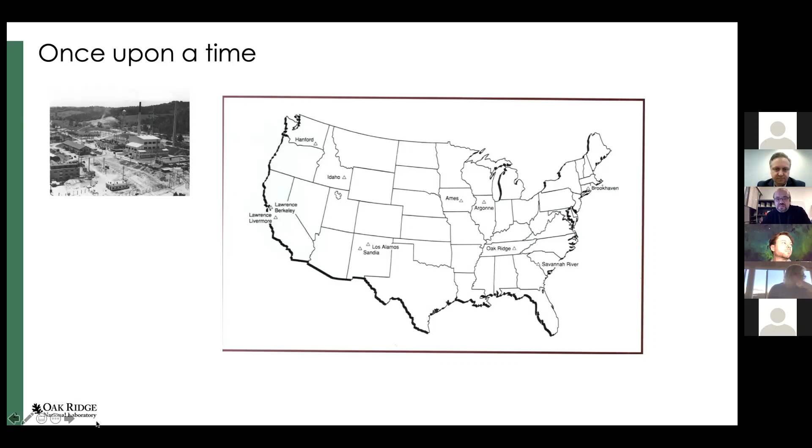And once upon a time, to be exact, back in 1943, as a part of the Manhattan Project, they bought a piece of land here, which is quite remote from everything else, to start the X10 facility, which is the graphite reactor shown here for the Manhattan Project. So it's a part of the other national labs. It's the largest one of them, I believe. And right now, this is what it looks like.

It has two main campuses. One is the campus in Oak Ridge itself, that's where I am, and another is the NTRC campus, which is in West Knoxville. It's about a 15-minute drive from Oak Ridge. And this is where we have the battery manufacturing facility and additive manufacturing facility.

We actually house a full industrial battery manufacturing line here, which can produce, I believe, up to 5 amp hour capacity pouch cells. So there is a pouch forming machine, an electrode punching machine, an electrolyte filling machine, and all that. And we can pull the vacuum on those pouch cells and weld the tabs and test them there. I believe the total workforce is about 6,000 people. 2,000 of those are R&D scientists.

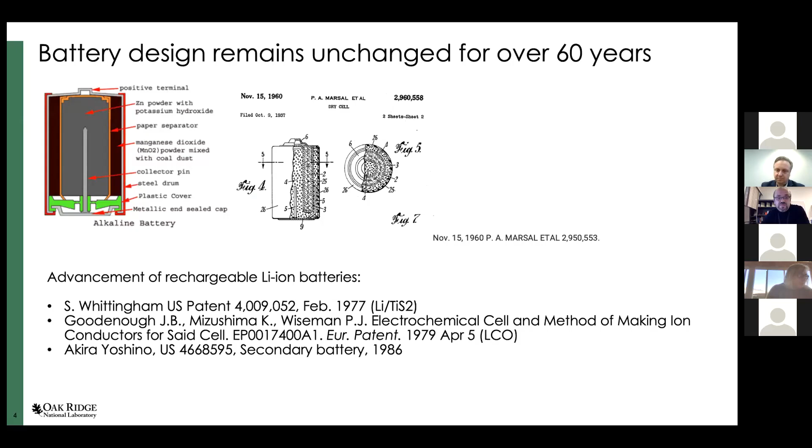So why are we thinking of changing something in terms of batteries and solid state? If you think about it, the design of batteries hasn't changed over many years, 60 years or even more. These are the pictures from the alkaline battery patent filed by Marsal et al. in 1960. And this cylindrical battery form with the positive and negative electrodes separated by a porous separator remained the same over many years.

There are obviously advances in rechargeable batteries, lithium-ion batteries, starting with Stan Whittingham and John Goodenough introducing lithium cobalt oxide into the system. So there's been a lot of research on increasing the capacity of the cathode material, coming up with different ways to manufacture the separator, but the overall principle remains the same.

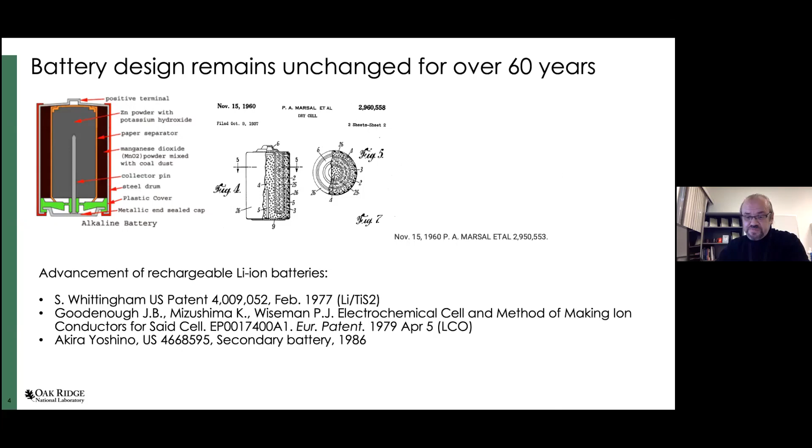But like I said, the basic operating unit of the battery remains the same over many years. You have positive and negative electrodes flooded with the liquid electrolyte, which has flammable solvents. It has a salt dissolved in the organic solvents, which are quite flammable. And the only thing that separates electrodes of opposite polarity is the separator, which is a porous polymer membrane. This is a highly anisotropic system. You have particles that behave ceramics-like mixed with rubber-like binder materials and coated on top of the metallic current collectors.

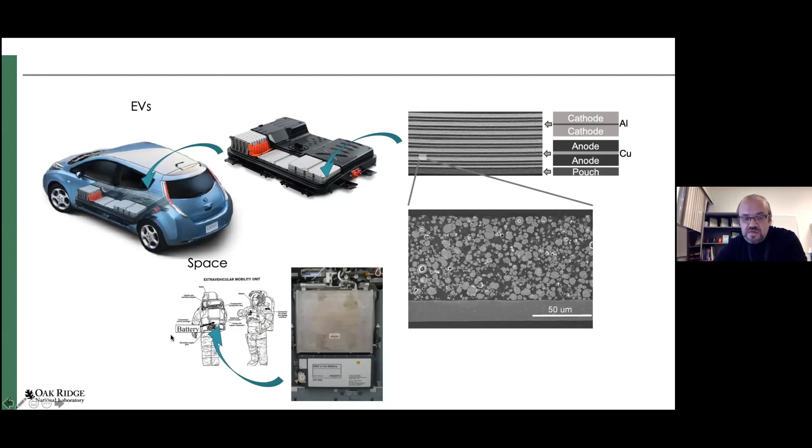And the safety of this whole system relies pretty much entirely on the integrity of the separator, which is a critical component here. Once it fails, you have contact between the electrodes, positive and negative, which releases a lot of energy. And since you have flammable liquids in the system, this can lead to consequences. Now, the thing is, there are not so many requirements on the mechanical integrity of the separator. If you look into the standards and literature, the biggest standard you can find is that it should withstand the tensile force of the winding machine when you're making a battery, and that's not much of a force, to be honest with you.

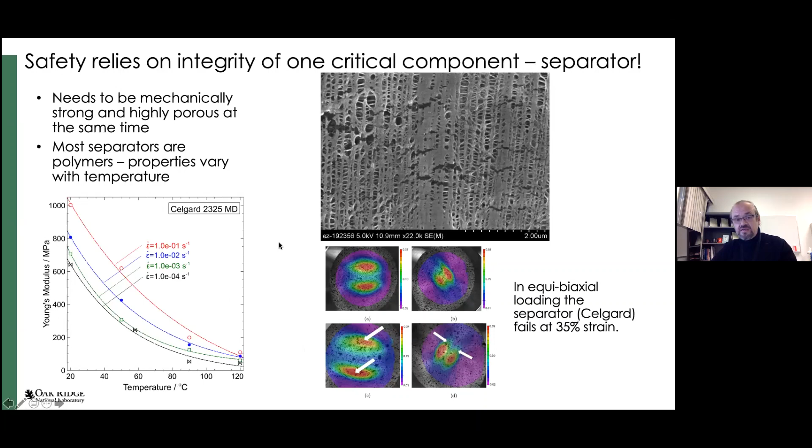So, fun fact: it being polymer, its strength and its properties obviously greatly depend on temperature. And if you look at this graph, at the operating temperature of batteries, just increasing it a little bit will decrease the Young's modulus by a factor of 2, depending on the applied strain rate. This is in tension for the Celgard separator. And another fun fact, it takes only 35% of biaxial strain to break it. This was part of the Department of Transportation project to find out how the pouch batteries fail due to the penetration of the trailer hitch through the battery pack. So it's only 35% strain. And then you have a failure, and then bad things happen, something like this.

These are all very familiar pictures that everyone has probably seen online, except maybe, let me see if I can get the pointer going, except maybe this beautiful firework. And believe it or not, this is actually the battery from that EMU unit that the astronauts carry on themselves. So this is what happens when you get the short circuit and thermal runaway in that system.

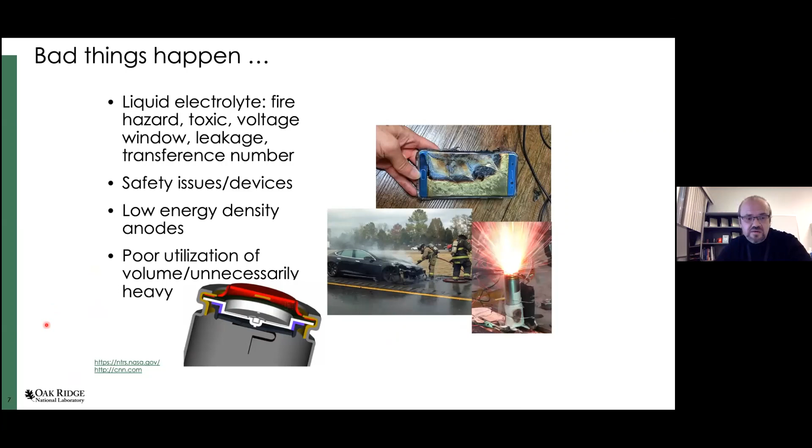So it's only natural that instead of dissolving salts and having electrolytes with limited transport number and highly flammable properties, it would be nice to switch to something else, more safe, with the transport number as close to unity as possible, and having transport over the crystallographic lattice rather than by dissolving the salt in the liquids. And so these are the advantages of solid-state batteries, some of which are quite obvious. As I mentioned, there is no electrolyte to burn, there is no gassing, there is no need for sophisticated fire protection systems as a result of that.

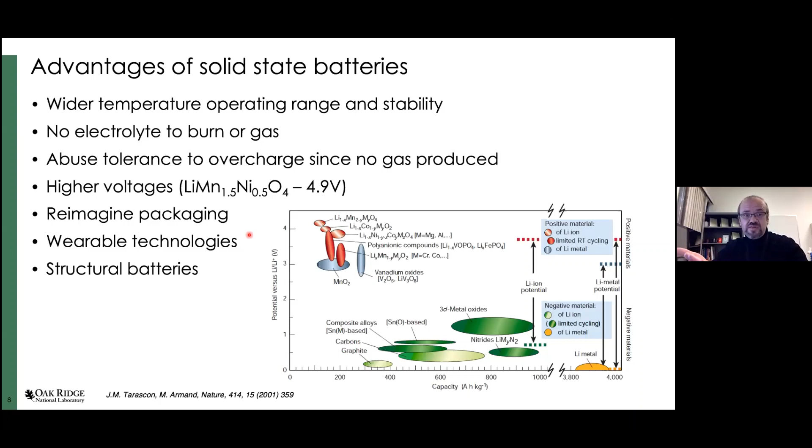You can get to higher voltages, especially if you use metallic lithium as your anode, which creates the highest possible potential window. And the last three are very interesting to me, because since these are solid state, you can reimagine how they're packaged, you can reimagine how they're made. In the extreme visionary cases, you can even imagine them being 3D printed into different shapes because they're so flexible in shape and form factor. You can introduce them as wearable technologies. And finally, because solid electrolytes, if they're designed properly, are quite stiff, you can potentially integrate them into structural components. So these are all advantages. Looks good on paper. It's a great idea, but we are still kind of far from realizing it.

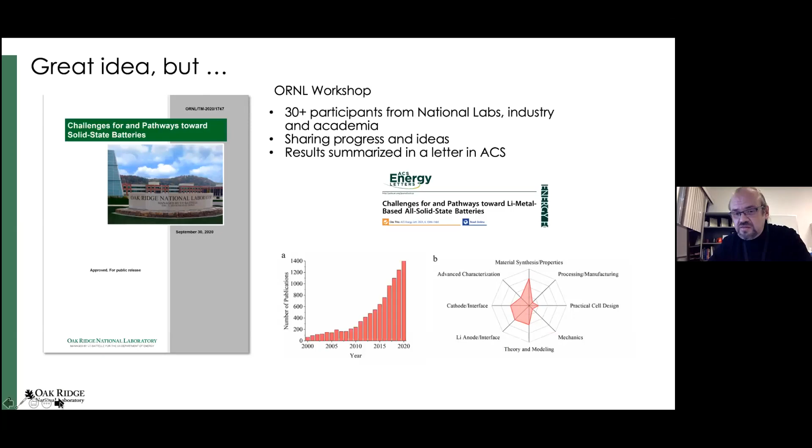working. And there is not much knowledge on the mechanics, whether it's important or not, mechanical properties of the components, and how to make all those battery components play nice with each other and create robust interfaces. So this mechanics part is probably what I will be focusing on mostly in this presentation.

Now, the key for the whole solid-state battery deal is the electrolyte, because it should work with the lithium anode. And throughout the talk, the anode here is metallic lithium, because it only makes sense to move to solid state if you have metallic lithium, because that's when you push your energy density to the maximum. So it should interface lithium anode, it should interface cathode particles, presumably the same cathode particles that we know are working now in the conventional batteries.

And at both interfaces, there is a chance for fracture. There are mechanisms for stress relaxation, about which I will talk. There is obviously, since we're talking about lithium, which is a highly ductile material, influence of plasticity and creep, but it doesn't always operate. Again, I will talk about it in a few slides.

And when it comes to the interface with the cathode, simply because repeated insertion and removal of lithium-ion creates strains, we're well aware of that, especially in the layered transition metal oxide materials. You have strains along the c-axis, so your electrolyte should maintain contact with those particles throughout the cycle. That's the idea.

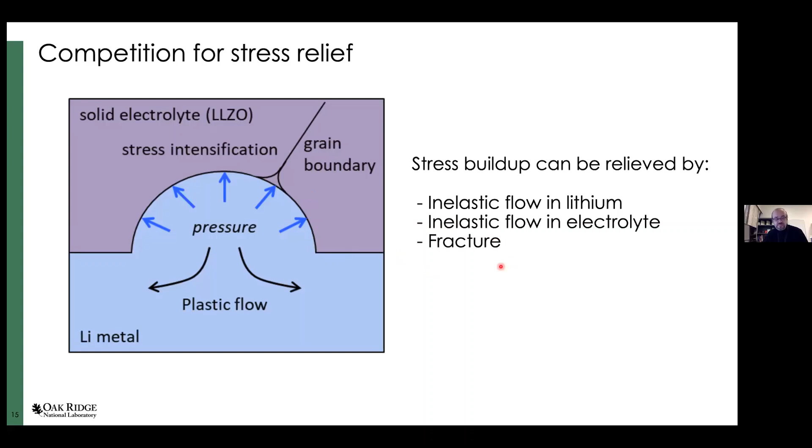And the third mechanism, which unfortunately we encounter in the majority of cases, is fracture that will reduce the stress buildup. So our goal here is to somehow trigger these two mechanisms in either lithium or electrolyte to avoid the third way to reduce the stress. So let's start with what happens in metallic lithium at the appropriate length and time scales.

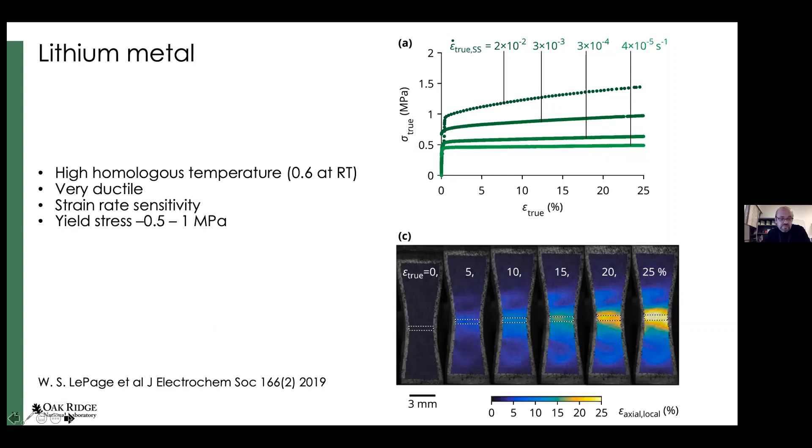So this is a very interesting mechanism, because if your defect is very, very small, lithium can relieve stress by diffusion. Since the distances are very small, it has just enough space to reduce the stress buildup simply by diffusion. If your length scale is large enough, it can start relieving the stress by dislocation motion. But if there is a defect of just the right size in between those regimes, it will build up stress to very high levels. So this is what can be called a danger zone. This is quite a peculiar behavior of lithium.

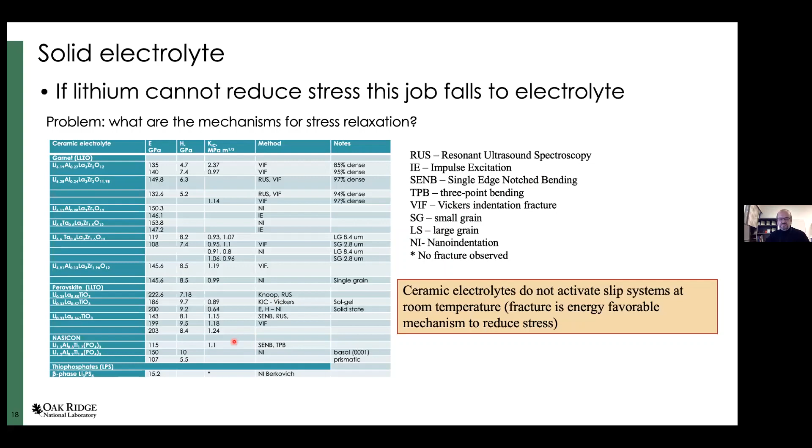This table compiles values of fracture toughness obtained by different methods, and we need to be really, really careful how we compare them, because fracture toughness obtained from single edge notch bending represents the strength of many grains. It's really a bulk measure, and fracture toughness obtained from nanoindentation is a totally different measure.

And Dr. Kalnaus, we have a question, if we can, because it's related. We have 2 questions. Yeah, sure. Sorry, because it's related to slide 17, I think. There's a question from Matt Petraquila. Is the length scale versus strain rate of interest primarily in electrode thickness, or would this be considered a potential limitation of pouch cell form factor size in the length times width dimension for material creep?

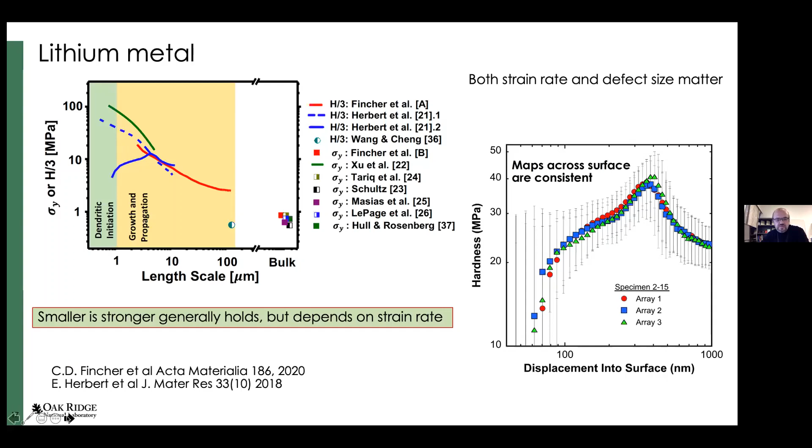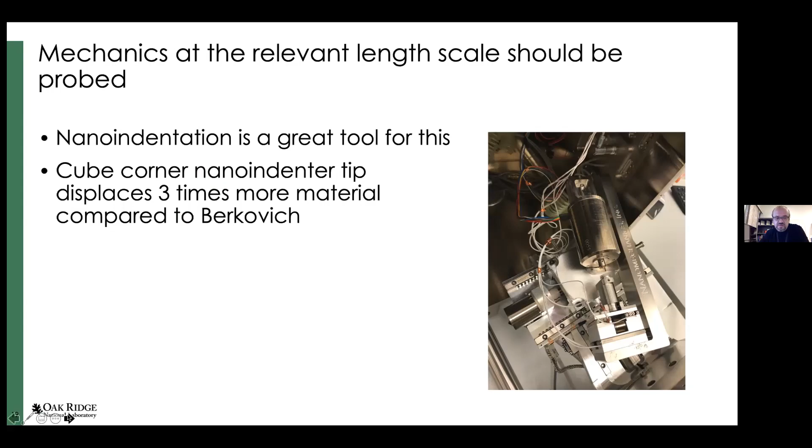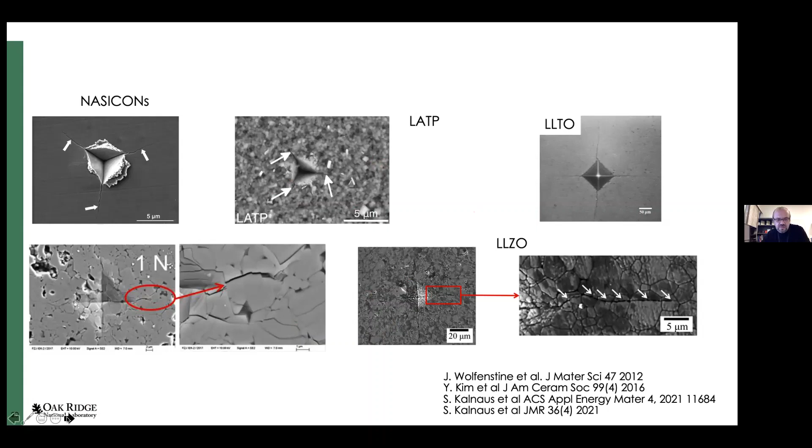And if you do these tedious, almost sadistic experiments of doing this many times and measuring the crack lengths, you can numerically calculate the fracture toughness and get exactly those values that are shown in the table. Most of them are 1 megapascal square root meter or less. So this sounds like we're almost doomed, because all of the materials fracture, all of them will let lithium dendrites go through and deposit into those fracture surfaces. But there is actually a glimpse of hope. There are some ways to impart some ductility into ceramics.

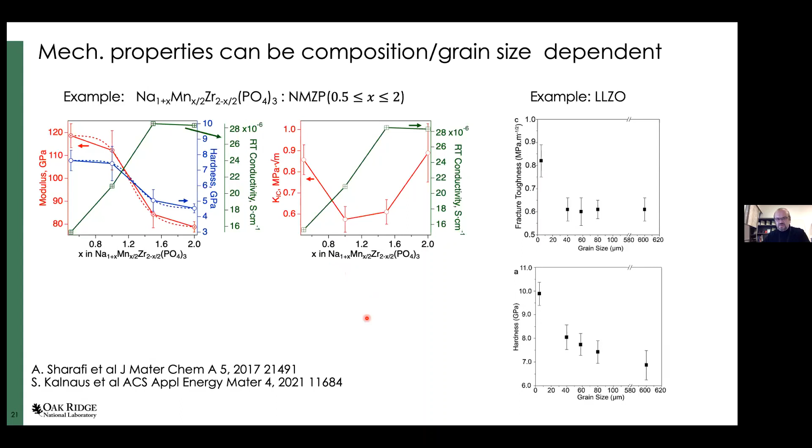Oh yeah, I need to mention that these properties, fracture toughness and elastic properties, very often depend on the composition and are connected with the ionic conductivity of the materials, as shown in these 2 examples, one for the LLZO garnet and one for the NASICON electrolyte. The nature of this dependence is still unknown, but it can fluctuate quite a bit depending on the composition of the material. So are things really that bad, and what can we do to make it a little bit more robust?

So one scenario that is picking up attention in literature, and I think in many cases it's the way to go, is to introduce dislocations into ceramics during the manufacturing. Generating dislocations in ceramics is hard. It's very hard. That's why they fracture so easily. But moving the existing dislocations is much easier. So the question is, why not implant the dislocations? And this procedure is known as dislocation toughening. You can implant dislocations into ceramics just by using different processing methods.

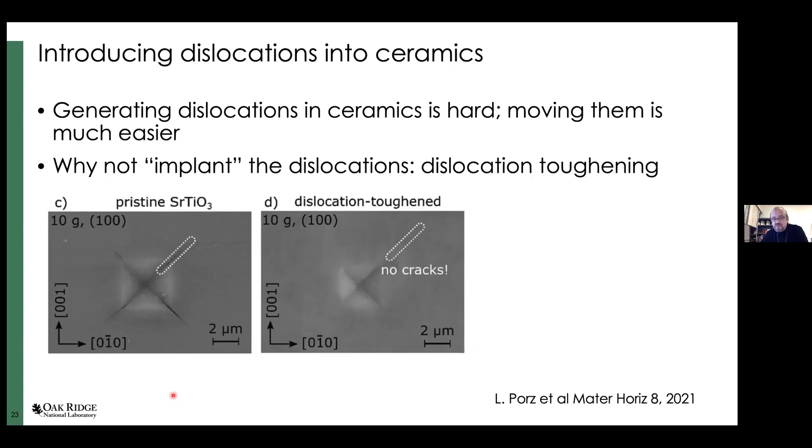But the results are quite clear. You can see the cracking here, and after dislocation toughening, the same Vickers indentation produces no cracks. So that could be one of the potential routes to battle that brittleness in crystalline ionic conductors. And another way is to use ductile electrolytes and step away from the ionic crystals and look into the glassy electrolytes.

So amorphous or glassy materials are very weird because in addition to just fracturing, they deform without conserving the volume. They can densify. They have just enough free volume to absorb plastic deformation by densification. So they have three mechanisms to reduce stress. Ceramics pretty much have only one, fracture. In case of glasses, you have three ways to reduce the stress buildup. One is the material can densify.

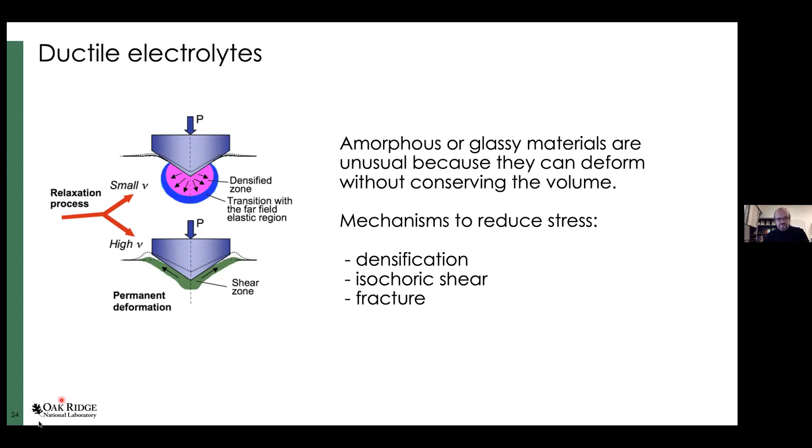It can flow in shear, very surprisingly. Actually, glasses can flow, can produce somewhat plastic deformations similar to metals. And obviously, the third mechanism is fracture. And again, our goal is to find the material that can densify or flow in shear, but should not fracture. And it seems that LiPON, I have to be patriotic about LiPON since I'm from Oak Ridge, LiPON is one of those materials.

So this is a simple comparison of a commercial borosilicate glass, which has glass formers inside, so it has a pretty rigid structure, and LiPON indented by the cube corner. This was indented to 50 millinewtons, and this is to twice the load. And you can see that LiPON deforms, shows very substantial pileups. It deforms in shear without any evidence of cracking. So this is very high load indentation. The nanoindenter went more than 2 micrometers down into the material without producing any cracks.

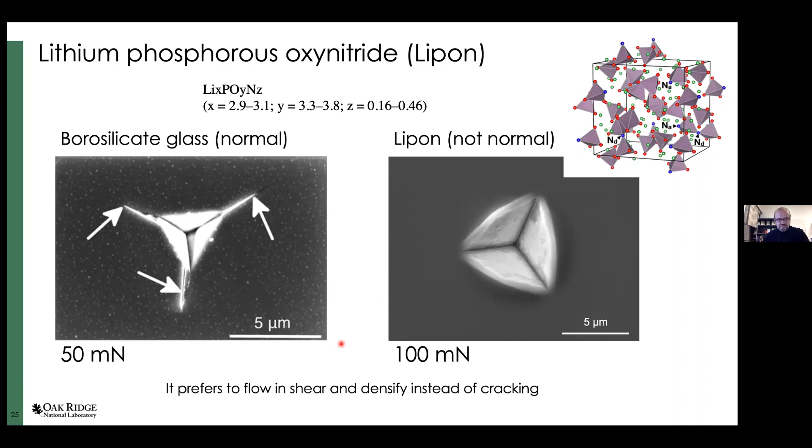So this unusual behavior has something to do with the structure of LiPON. That's why it behaves so abnormally. It doesn't have a rigid structure. The phosphate tetrahedra are relatively free to move around in this almost a soup of alkali ions, of lithium ions. And they're relatively free to slide with respect to each other and deform bond angles. And the amount of nitrogen that connects those tetrahedra is relatively small. So it allows it to deform without producing any cracks.

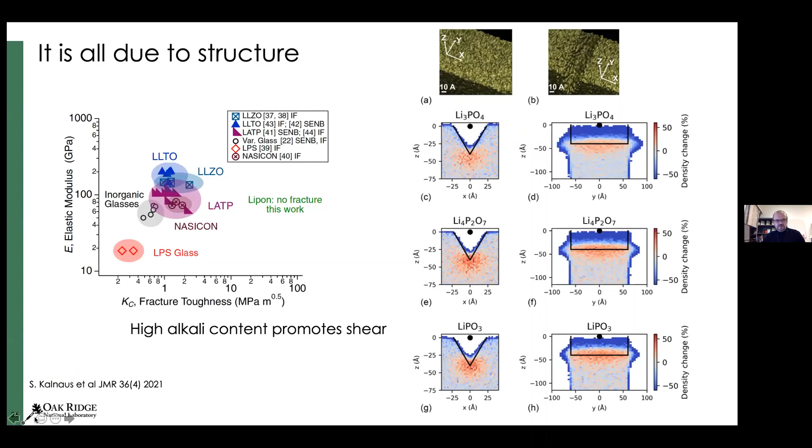And all the simulations are unfortunately done without nitrogen, simply because the force field for compositions with nitrogen is not known. But we don't believe nitrogen would change this behavior too much. What is clear here is that the material with the highest concentration of lithium or alkali ions in the system exhibits most of the shear deformation. So we have 3 lithiums per 1 phosphorus. This is exactly what we have in LiPON. The take-home message is that high alkali content promotes shear in this material. And again, no fracture has been observed, at least under these loads and these strain rates.

So it can densify and then restore that free volume a little bit. Now, this is not new for many glasses. Many glasses can do that, but you will need to input some thermal energy into the material to allow it to restore this deformation. And in LIPON, this happens at room temperature, which is absolutely bizarre, and which inspired us to do this weird test where you apply the sawtooth signal to the nano-indenter.

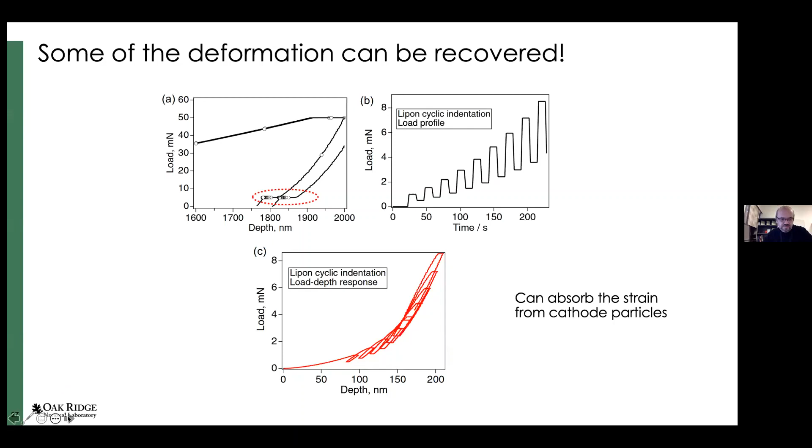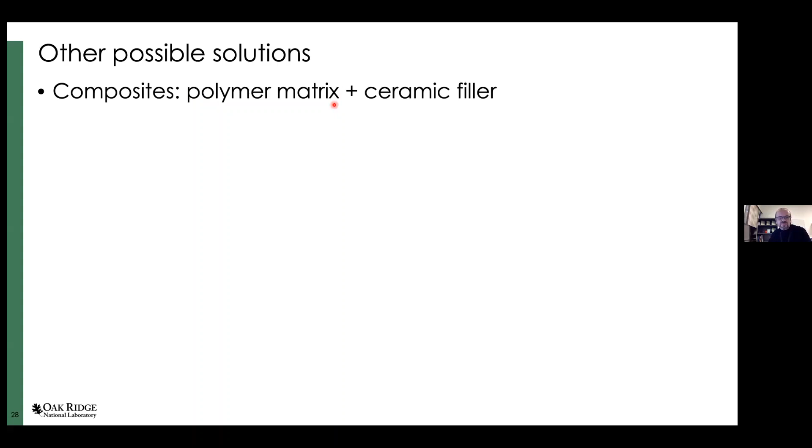So other possible solutions that people looked into are composite electrolytes, where you mix a polymer matrix with the ceramic filler, and just like in any other composite engineering, you impart strength by the ceramic filler, and the polymer matrix is supposed to provide ductility and play a role in the ion transport. However, if you do that with a very dry polymer, addition of the particles of the single ion conductor actually does more harm than good.

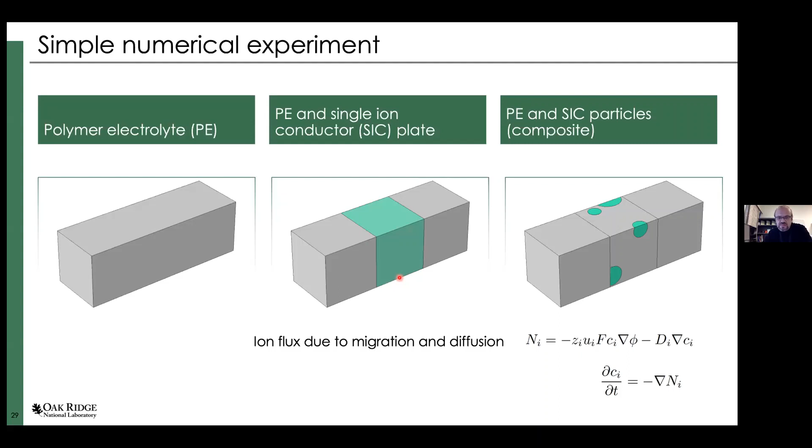But if you do, like I said, the simple numerical experiment, you can see that the effect is actually opposite. If you place the composite electrolyte in the middle here, because you still need to observe electroneutrality in the whole system, right? You develop much higher concentration gradients and obviously much higher polarization at the end.

Unless you place a barrier in the middle which is not penetrable for anions in the polymer. In that case, you split this domain into two subdomains, and in each subdomain you have to observe electroneutrality, and the overall concentration gradient obviously diminishes. But using composite electrolytes with the dry polymer doesn't seem to be that feasible. And this has been confirmed experimentally as well. You can compare the simulation results with the experiments.

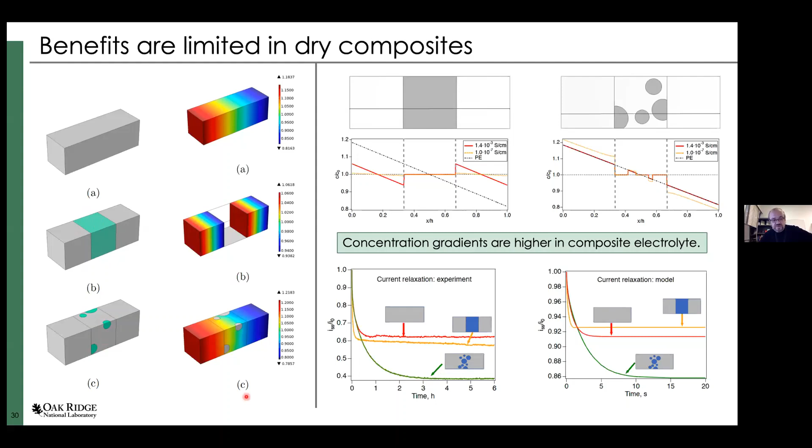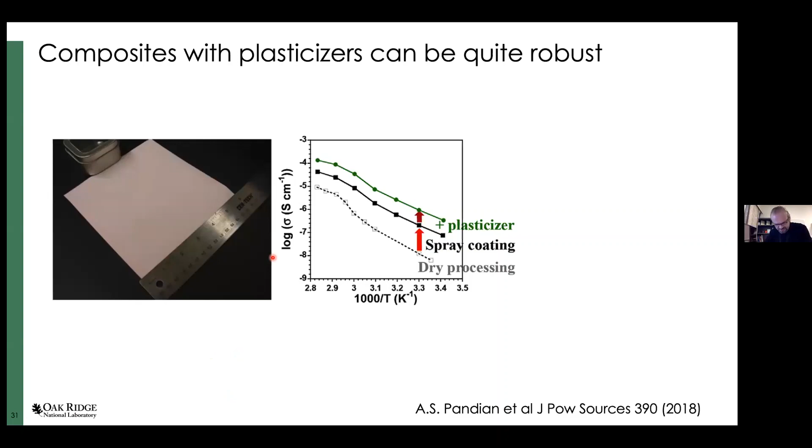So to overcome that, people use composites with plasticizers. They can be quite robust, and they promote ionic transport through the polymer phase. And in addition to that, they improve the transport number by tethering the anion from the salt around the single ion conductor particles.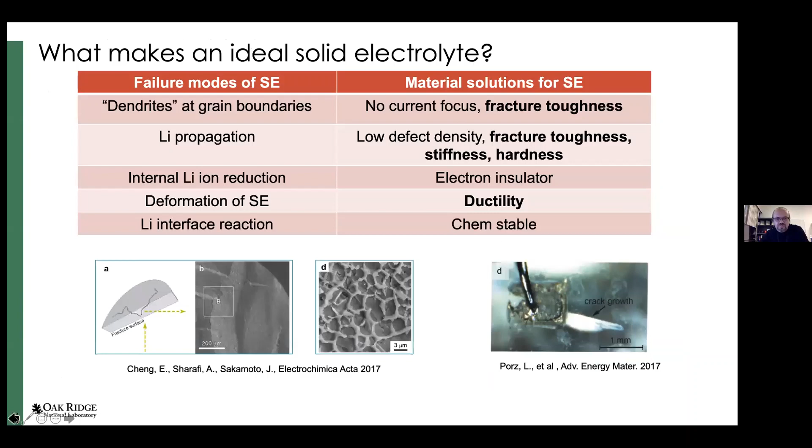So that's probably a good transition to Marcus' question. Could you comment on the need for pressure in the solid state cells? I think you had a brief slide or a brief discussion on it at the beginning, but if you could go back to that. Yeah, that's just simple brute force to keep all the interfaces together.

Because these cracks appear, you have dimensional changes in the particles, active particles of your material. And imagine the same thing happening on the negative electrode side if you use silicon, which can deform to hundreds of percent of strain. So these cracks will appear, and this is where the contact will be lost. So you don't have the transfer of your ionic current into the electronic current at this interface anymore.

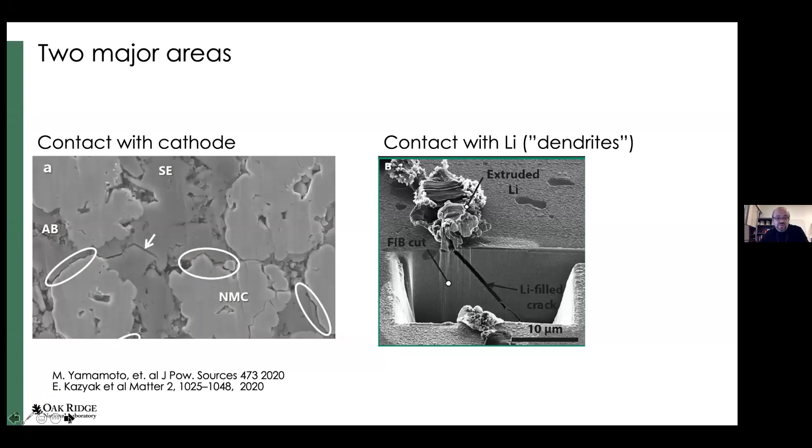But then again, 75 megapascals is okay if your footprint is a tiny little experimental cell. If you apply that much pressure over a large pouch cell, let's say from a Ford Focus EV, for instance, that will require a lot of force, very impractical. Mark, I unmuted you in case you want to add anything.

Yeah, I'm quite concerned about these pressures. If you're scaling up and trying to make large pieces, if you have any kind of flaw, are you just going to crack your solid electrolyte? That's one of the things that I'm concerned about. But yeah, those are huge pressures. Yeah.

It's a brute force method of keeping your interfaces together. Yeah, I find it hard to believe that it's a practical solution. No, not at all, not at all. Yeah. We do like to keep cells under pressure in the battery pack, obviously, but it's orders of magnitude less than that. This is very much impractical.